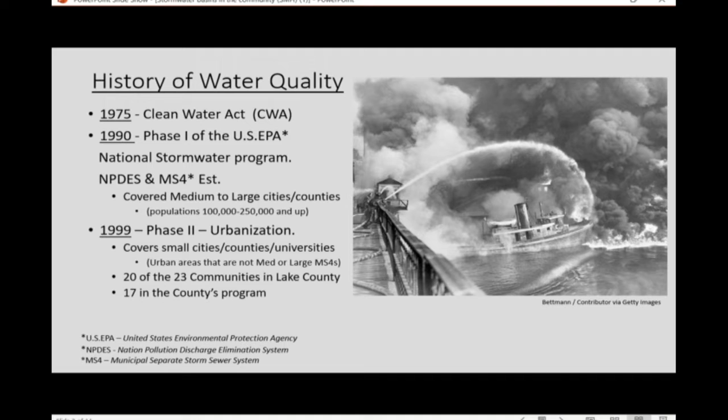The history of the stormwater department started in March 2003. This was in direct response to the small MS4 phase 2. And I know I'm throwing a lot of acronyms at everybody. It's the government, we like acronyms. Just refer to the footnotes down at the bottom. They are defined. I don't want to spend too much time going through it. It's a lot. But basically, this was a mandate from the OEPA/EPA to gain compliance for the MS4 permit. Lake County Commissioners has this permit. We really work towards compliance with that.

We formed as a regional stormwater district, essentially, under ORC 6117 and its subchapters. It's under the Sanitation Engineer's authority. That's really what gave the commissioners authority to lay that out as a department. And in 2008, the Stormwater Department's rules and regulations went into effect.

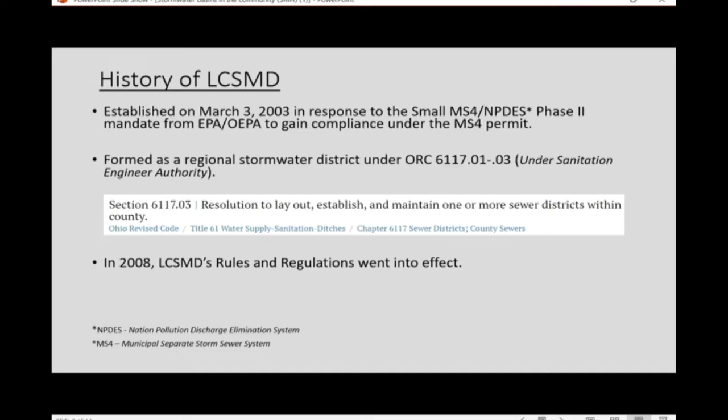So what does Lake County Stormwater Management do? Essentially, we are a regulatory agency in charge of the county's MS4 permit compliance program. Listed below are 6 MCMs, and that stands for minimum control measures. Basically, these are milestones that you should be hitting during any MS4 compliance program. We are involved in at least 5 out of the 6 directly, and our program also affords the opportunity to assist our 17 member communities to perform regional stormwater improvement projects, as well as maintaining compliance under the small MS4. Today we're going to be focusing on MCM5, post-construction stormwater management in development.

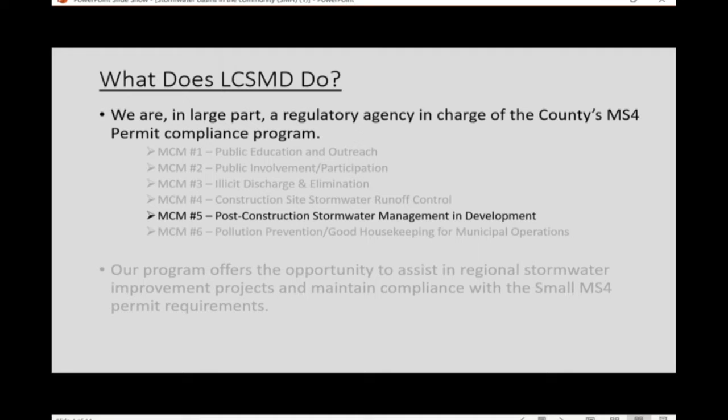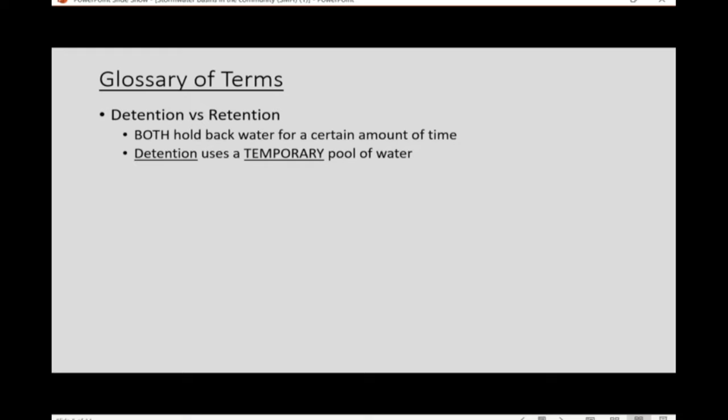Before we do that, I want to go through some terms that we're going to be discussing to bring everybody up to speed. 2 terms that are commonly used interchangeably are detention and retention. They both do the same thing, they just do them in different ways. They both hold back water for a certain amount of time. Detention, if you remember in school, if you got in trouble and got sent to after-school detention, you were not there forever. You were there temporarily. Thank God. So detention is a temporary pool of water.

Stormwater practices that are dry detention are dry basins. This is traditional stormwater detention where there is no permanent pool of water. It provides no water quality treatment, so it's those depressions in the landscape where you think there should be water and there currently isn't, unless it has just rained. Dry extended detention is the same as a dry basin. No permanent pool of water, but this one does provide water quality treatment through a slow release of a volume of water over time, typically 24 to 48 hours.

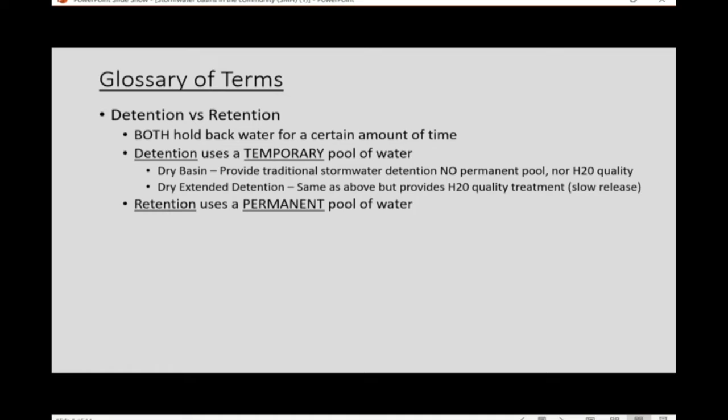Conversely, retention uses a permanent pool of water, and we'll see a couple of examples of this as we go forward. A wet basin is a wet retention basin. It is the same as a dry basin, but it holds a permanent pool of water. It also does not provide water quality treatment. A wet extended retention basin is the same as a wet basin, where it has a permanent pool of water, but this one provides water quality treatment through a slow release over time.

Another term we will be talking about is an easement, and in terms of post-construction management, we're talking about an area of land that's been legally described and dedicated to an entity, either public or private, in order to provide access, responsibilities or maintenance.

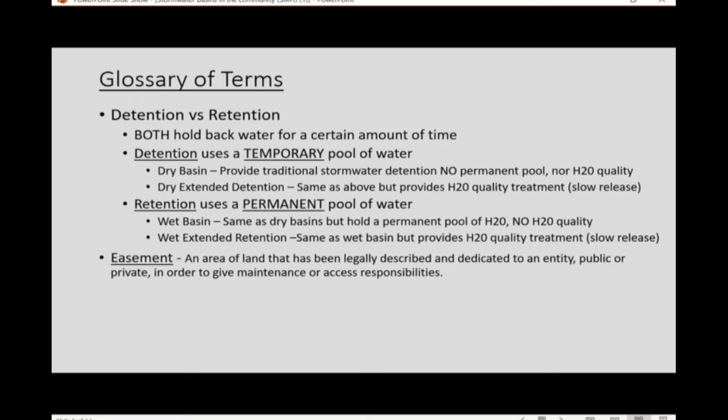Easements can be found on a map when we're talking about post-construction practices, or a plat. A plat is a legal description. In this case, our examples will be a residential subdivision. You can find these plats on the county auditor's website. Basically, it goes through and describes black and white where the boundaries of a subdivision are, common lands, center lines of roads, things like that.

And a water quality orifice is a small low flow orifice in the outlet structure that passes the first flush of stormwater through the basin. These things can range anywhere from 3/4 of an inch, sometimes smaller, up into 2 inches, sometimes a little bit bigger, depending on the design of the subdivision. And that is what kind of determines those wet and dry extended detention and retention basins, because that is what provides that low flow over time.

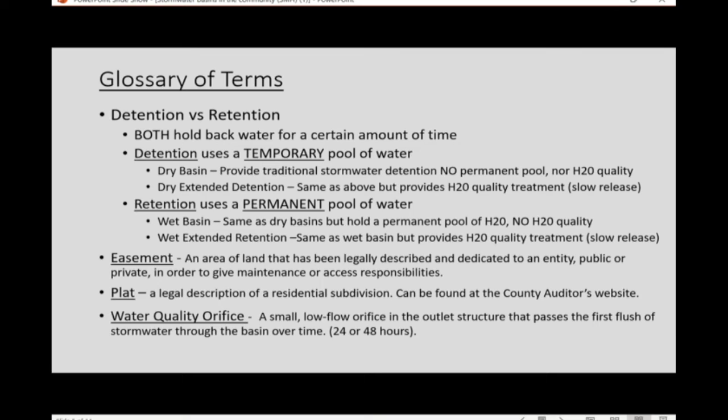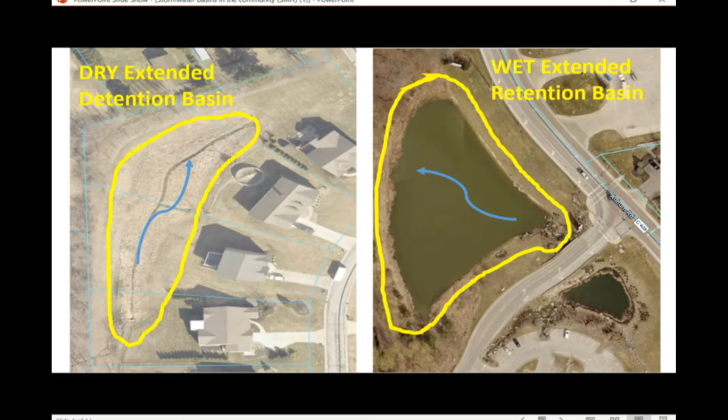Steve's now going to talk about this example of an outlet structure we typically see in residential subdivisions that provides water quality treatment, and that's the dry extended detention. Steve? Yeah, thanks, Nick. So you guys have probably seen in subdivisions or on ponds those big concrete looking structures and wondering, hey, how does water get in there? How does it leave the site? So basically that concrete structure, those are a catch basin or an outlet structure. And those typically have holes or designed windows, things like that, that allow water into the outlet pipe at a controlled rate.

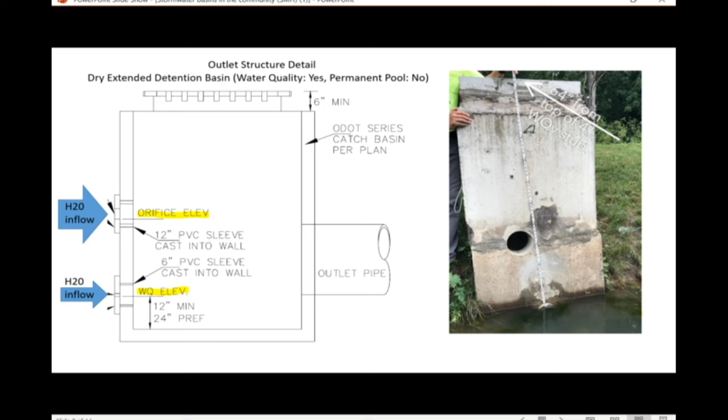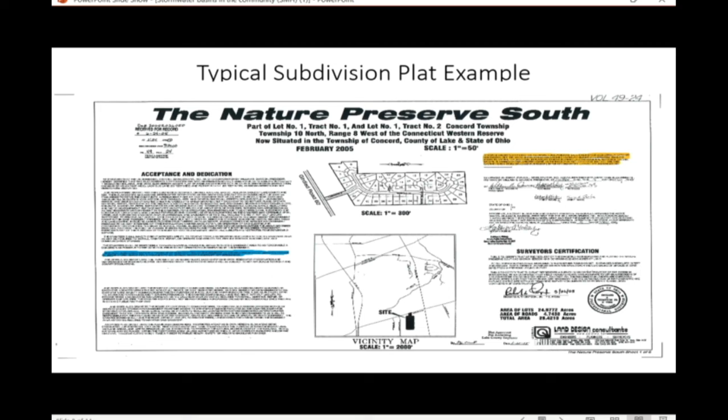But that gives an idea that there's an easement that actually goes over that pipe to protect it, and also gives the township the right to repair it if there's any issues with it in the future, so the roadway doesn't flood or water can continue to drain. Same way with the local service drainage easement. The yellow is actually over the entire basin, and that's like a local service drainage easement that's typically deeded to an HOA or a party to manage the overall basin.

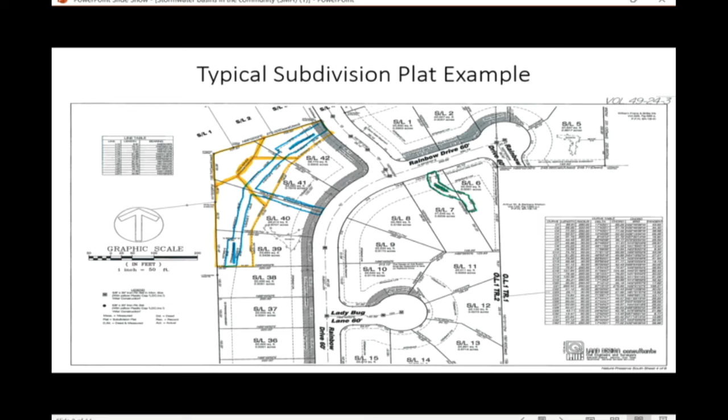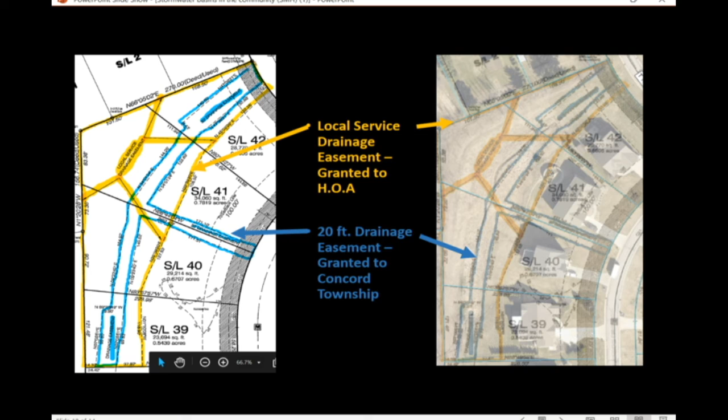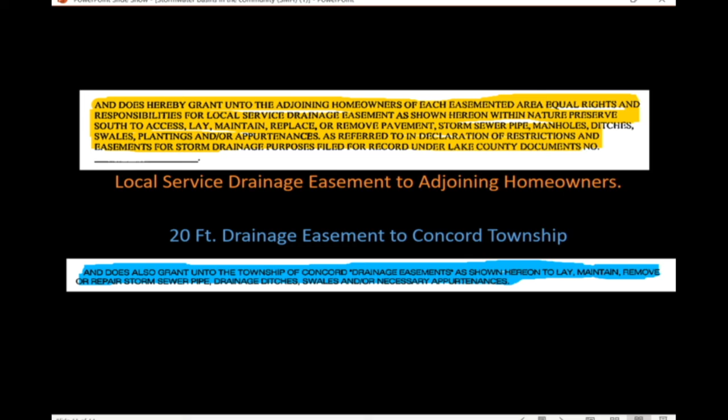So here's kind of close-up language on what was on the title page. Basically, the top goes over how the basin is dedicated to a party and gives certain responsibilities on maintaining the pond. It could be to dredge and excavate, basically re-swale, maintain vegetation, things like that. The blue one, the easement to Concord Township, goes over similar language, talks about repairing and maintaining storm sewer pipe, any appurtenances that would affect the performance of that pipe and allowing it to function as best as it can.

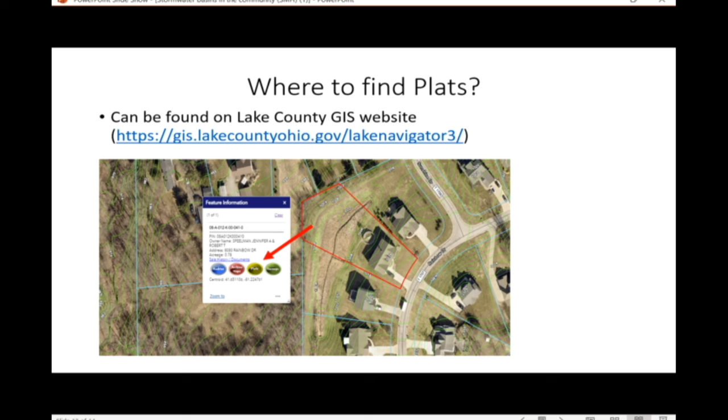So Nick also brought up, where can you find plats? Anybody can log on to Lake County's GIS site, basically type in the address of interest. You can click on the parcel and you'll have a pop-up window right there, and you'll be able to select the plat option, and it'll actually pop up the title page, and there'll be some options on the top left-hand corner on that page for people to select and go to. So with that, I'll give it back to Nick for inspection.

And once this is completed, we'll be looking for things like if the water quality orifice is installed, if emergency spillway is in, if everything is functioning, appurtenances are as they should be. Any deficiencies get noted, and if there aren't any, either way, they get sent to the entity that is responsible for maintaining that basin. In the example that we just showed, that would go to the adjoining homeowners and also Concord Township, because they are a party with a drainage easement in that basin.

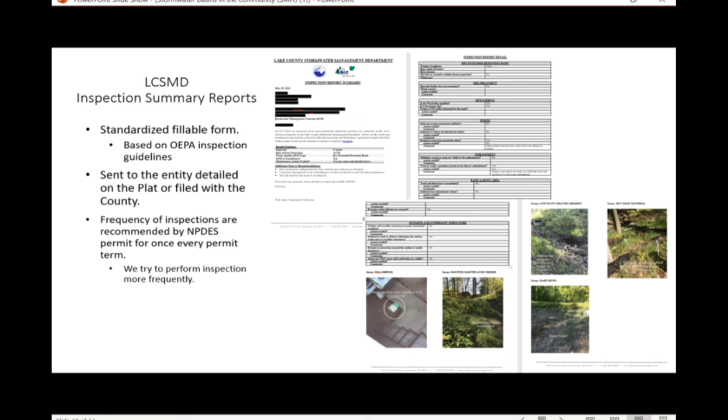The frequency of inspections for these, I know that's a topic that we get asked quite a bit. It's actually not spelled out in the permit so much, but we take those recommendations from OEPA. I think their recommendations are once per permit term. We typically inspect them more frequently than that. These types of inspections we perform for our member communities to try to keep everybody moving towards compliance. We like to work with, not against, HOAs, the townships and municipalities that may own these easements and be required to maintain them. We try to play the middleman kind of between the OEPA and those private entities. We're all trying to work towards a common goal of water quality.